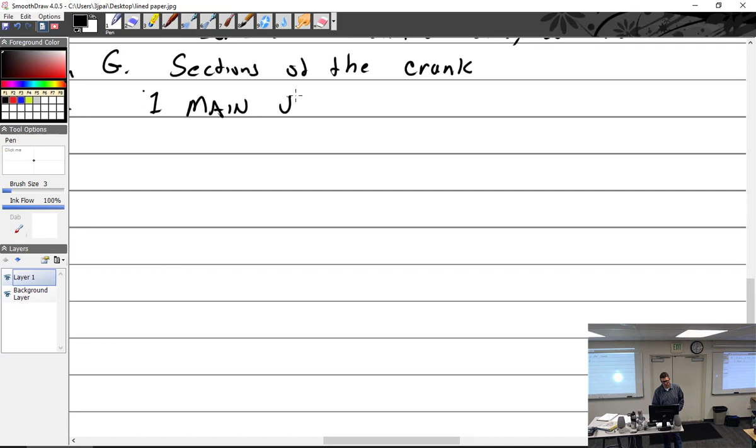All right, we are talking about crankshafts. I'm up to G, which would be the sections of the crankshaft or parts of the crankshaft. Sections of the crank. This is going to be the easy part right here. So we got the main journals. Main journals, which are right there. So we got the mains: 1, 2, 3, 4. Because Lycoming says this is 1, that is 2, that is 3, and that is 4.

And we've got the crank pins. Crank pins, also called conrod journals. So those would be that, and that. And if it is a Lycoming, this is number 1. This would be 2. This is 3. That must mean that's 4.

If it's Continental, it's backwards. Continental, because they're gold, that'd be 4. That'd be 3. That'd be 2. That'd be 1. Like with the bearings earlier when I looked this up there. All right, let me see.

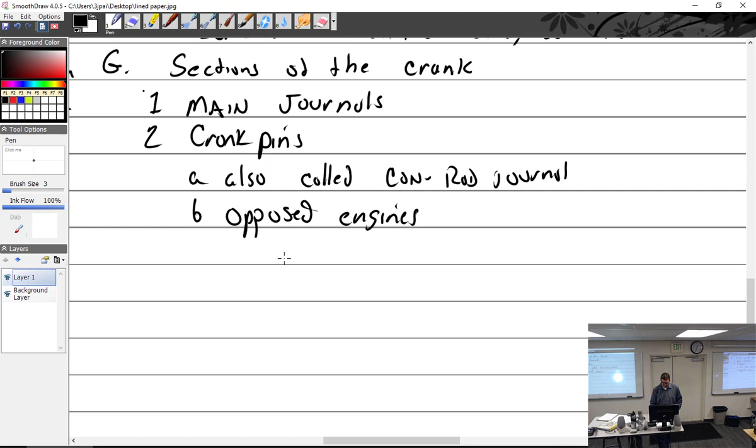B. So opposed engines, or boxer engines if you like, have 1 throw per cylinder. And a throw is just the journal. So the one we just looked at had 4 throws on it. They are numbered in order of cylinder placement, as I just showed you. So Lycoming has the 1 in the front, Continental's 1 in the back.

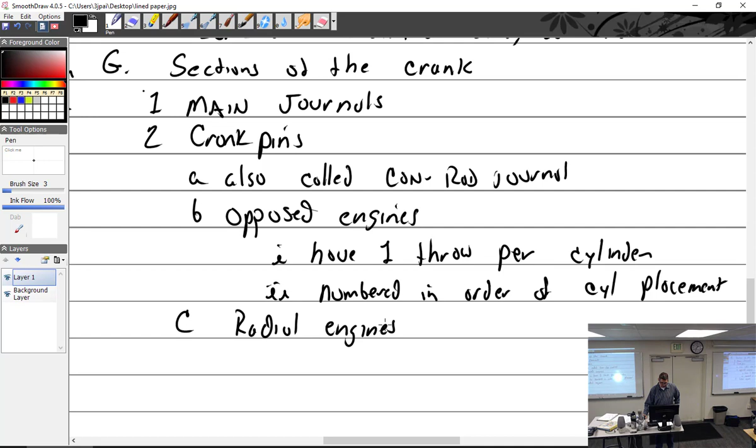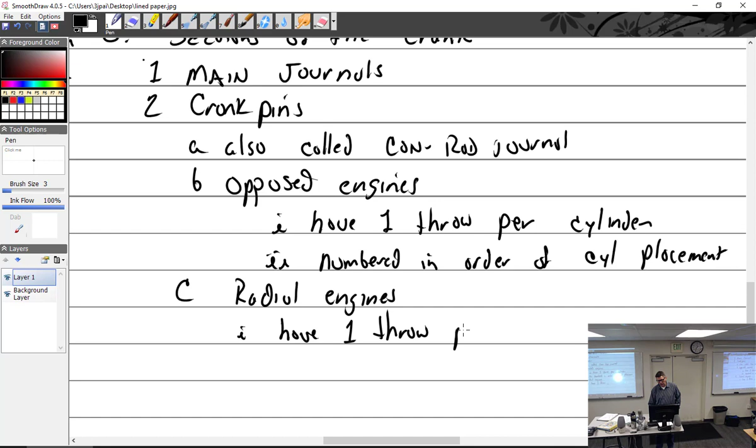Radial engines, they are different. Radial engines, they have how many throws? 1 throw per row of cylinders. So a single row radial will have how many throws? 1. And a double row will have 2. That's easy math.

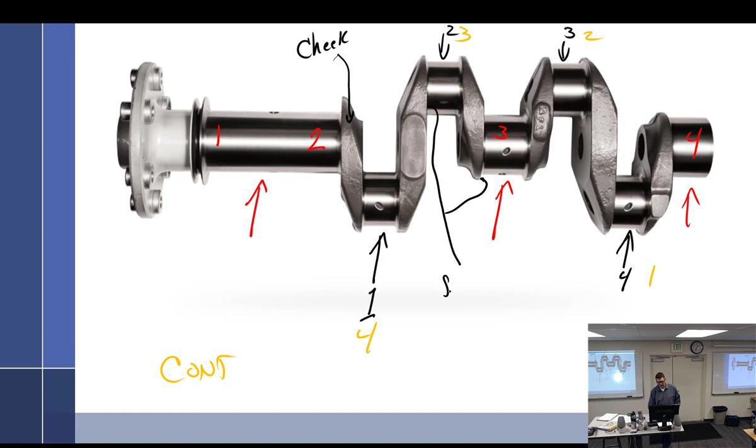Let's see, we have the crank cheek. That is, right, change my color. Right there, that'd be the cheek. And I think the next thing I have on there is the fillet, which would be any of these little corners right there. So what do I got next? Yep, fillet. That's the radius at the end of each journal. So right there too.

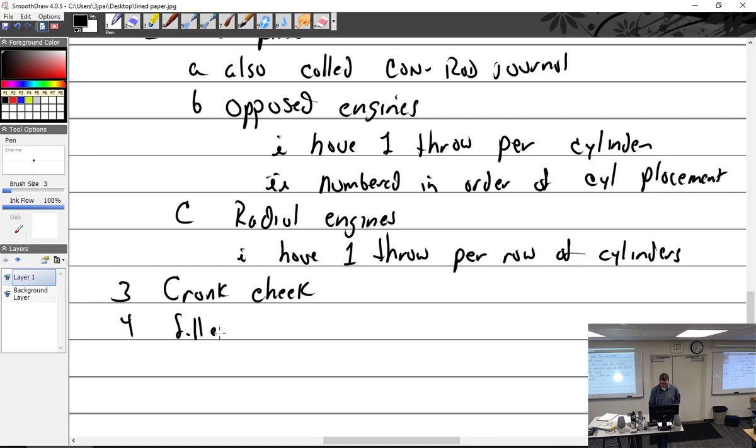Crank cheek, and let me see. And 4, we have the fillet. And that is the radius at the end of each journal. All right, let's see, anything else I got to say about this?

I guess so. I'm not going to write it, but up here on the crankshaft flange, we have the bushings. I don't know if I mentioned this here or some other place, but these bushings are not necessarily all the same. Some of them are different. They always take the same size bolt, but some of them are longer. That appears to be about yay long, and this one appears to be longer because it is longer. And what that is, it's an index.

And so there's a service instruction, shocking, that will tell you which engine where to put the indexed bushing, the longer bushing. And it could be a long one here and a long one over here, or just a long one there, or maybe a fat one here. This one, not to shame it, may be fatter. So it could be fatter, longer, different types.

And the whole idea is you as an engine mechanic are smarter than the average bear. And so you would follow the service instruction and put the index bushing in the correct place. And then the person putting on the propeller, who is not as smart as you, would have an idiot-resistant way to put the propeller on, because the propeller will then be indexed to the different bushings. There'll be a different hole in the propeller. And so the mechanic should see that and then install it.

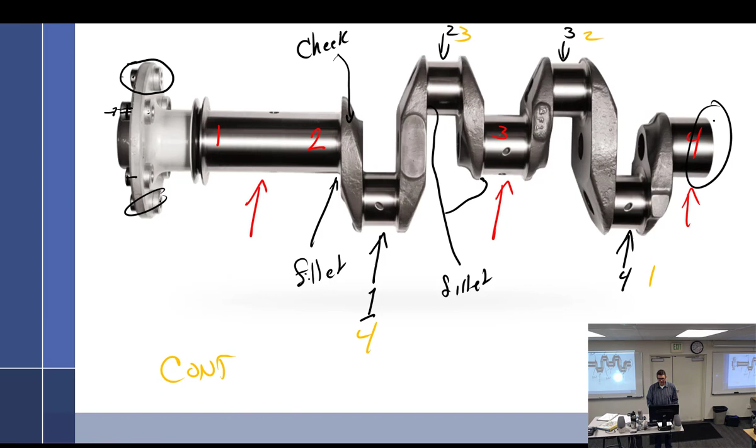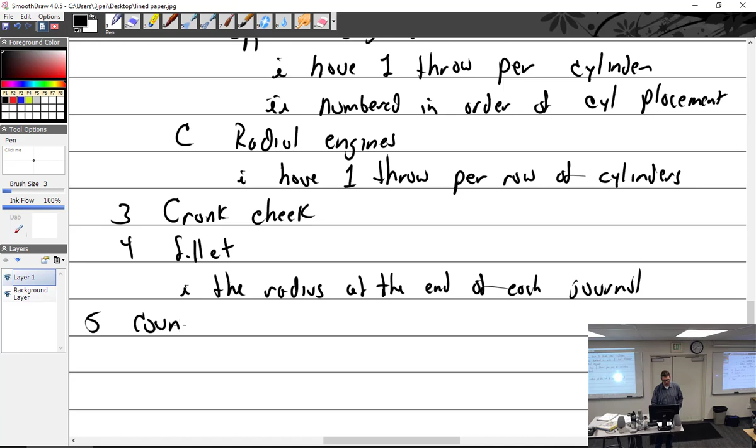Sounds good. All right. Okay, let's talk about counterweights. Bigger engines, where we're getting into the Lycoming 200 horsepower and up, they're 4 cylinders. I don't think anything below 200 has it. I could be wrong. We'll just say the Lycoming 360s, and the Continental probably 360s as well and up. Those are 6 cylinders. They have counterweights. Well, so does the radial engine I showed you, not to be confused.

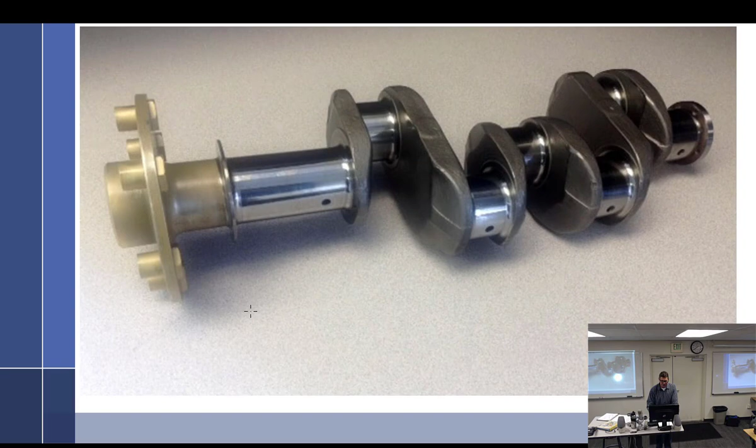So let's see, which way do I got to go? There we go. Obviously, this has gigantic, very heavy counterweights down here, but those are usually fixed. Not always. The smaller ones could be floating as well, but these counterweights have to be there, and they are fixed. This is just a crankshaft. It used to be. Somebody cut it very nicely right there. A lot of crankshafts have dynamic counterweights, not fixed. These would be called dynamic counterweights, and they're loose, and they're supposed to be loose.

And if you looked in your book and you're reading about it, you say, oh, of course, I remember reading that. The idea is if you were to take, and I should have made something like this, say a large nut on a string, and I hit that nut, it kind of comes back, and as it swings, I can hit it again, and every time I hit it, it swings further and further, right? So I'm setting up a dynamic imbalance.

The power pulses from the cylinders actually resonate through the crankshaft, and that's what it's like. And so you get this out of balance. It starts to repeat itself. We do it by order. I'll explain that. So what they do is, if you took that same nut on a string and tied a string to it, put another nut down here, every time I hit that one, it would go this way, and this nut kind of counteracts it, right? So that's what these are. This is the counteracting nut.

And, oh man, I'm trying to think. Some of the Continentals have 3 rows of these things, if I'm not mistaken. And then most of them have 2. So we'll say at least 2 on 6-cylinder; 4 cylinders usually have just 2 or 1 set. So you have a set here, and then you go a bit later and have another set. So there's these hanger blades, which are bushed, and they have the counterweights that ride in them, and they're loose. They're supposed to be loose.

How would I want to do this? So if you look at a cross-sectional area, a snap ring kind of looks like that. With a very square edge, kind of a rounded edge. It's just how they stamp them and how they make it. And so you always want it so that the force is going that way on it.

So in other words, when I put the snap ring into this, that very sharp edge goes outside and the rounded edge goes on the inside. So if you're trying to push that way, it catches on that sharp edge. So I always install my snap rings that way, since I did those and I kind of learned that. It's the only place it says it. You must put them in that way so that the force is going, trying to push it out that way.

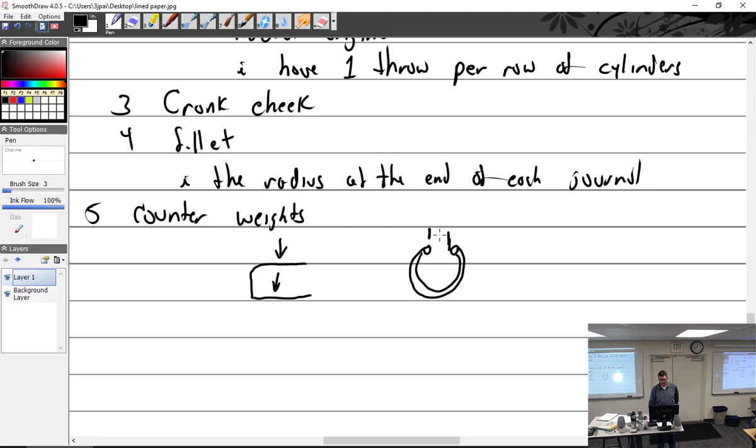One of the manufacturers, and now it's just kind of eluding me which one it is, the snap ring. Got the little hole right there. Of course, there's some depth to it. You have to measure this distance. Oops, actually this distance right here. That distance, you have to measure it, and it's part of the installation instructions. You measure from center of the hole to the center?

I want to know, because you can buy a no-go gauge where it's actually the space in between on the engines. But I can imagine, do you guys have some stuff on your helicopters where it's hole-to-hole? Probably. Okay, well, these are not hole-to-hole, they're inside. Oh, it's Continental. And so you have to make sure that you have the proper distance. If you don't have enough distance, what does that mean? Too small. It's not engaged into the grooves. You haven't engaged it.

And so, for example, this is kind of interesting. So, right, I told you over COVID we were shut down here. And so I still got paid, and part of the thing that I had to do was I had to do X number of hours of extra stuff for the school. Or I could go out and work in the field as development. And so it just so happened that Nathan, who was here the other day, called me up and said, hey, come, we have a problem. Are you available? I said, yeah, I'm available.

And it was kind of interesting. He had a 182 that had pulled up to the hangar. Did I tell you guys this story? No. I mean, if I did, you'll just take a nap.

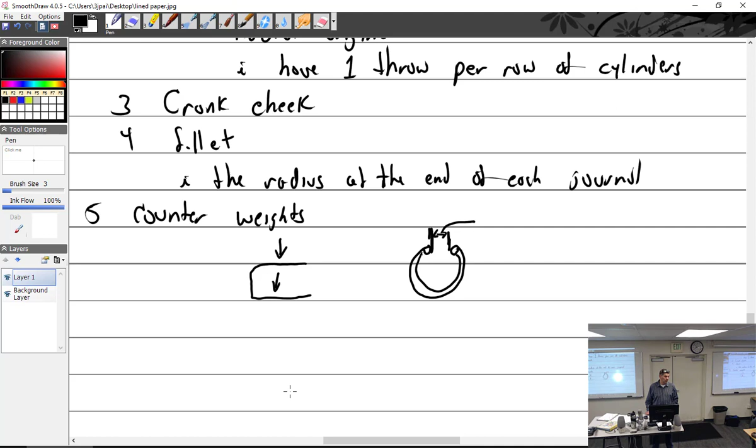So he took the prop off, sent it out to get overhauled. The overhaul shop said, nah, the prop's too old, we won't do it. So he had to buy a new prop, and that was a whole other disaster. But it quit throwing the belt. So counterweights, you know what they are? They are a problem. When you see them, run.

Mechanics do more damage to this stuff not knowing what they're doing than anybody else. They're really not that hard if you just pay attention, read the book. You've got to have the right service bulletin that tells you which position it goes in, what order it is, and what parts go in that order. Because most of the time, all the bushings are the same. It's just different roller pins that change the order.

So inevitably, well-meaning mechanics are going to take it apart. It's like, wow, I've got 4 of these things. I better make sure I get it back in the right spot. So what do they do? They get a big old number set and go whack! Put a big old dent in it right there. Or usually they just use a punch, put a dot here. They're smart. I'll put 1 dot here and 1 dot right there on the crankshaft. Then I'll put 2 dots here, 2 dots on the crankshaft.

Okay, don't do that. You're not authorized to be smashing dents into precision parts. But you can see there's a difference. That one's got a pin in it. That one doesn't. Yeah, you just don't mark stuff. Read the book. Read the service bulletin. Don't do it if you don't know what you're doing, because they're tricky. And if you get it off, you're going to have a harmonic balance problem.

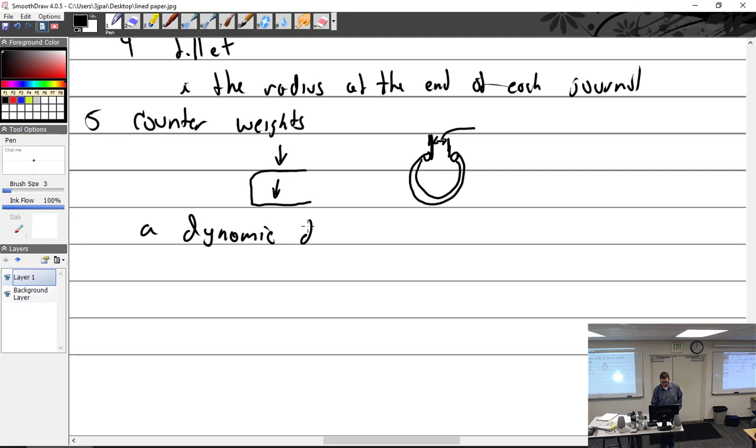All right, so dynamic counterweights. A lot to them, huh? Wow. Counterweights, a dynamic damper. That's what I call my kids. It is a swinging pendulum.

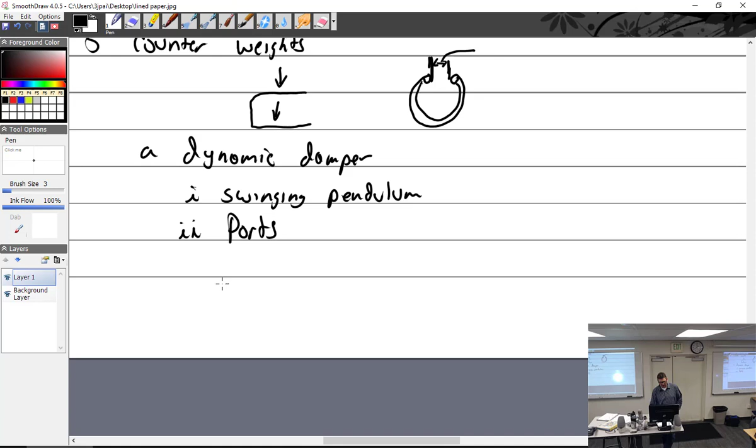There are a lot of parts. I want to write all the parts. Well, I guess I started parts. You have the CW, which is going to be counterweight. Counterweight hanger, or sometimes called the blade. This is the part that's part of the crankshaft. It's that part there. It doesn't come off. It's made into the crankshaft. So we got the counterweight blade.

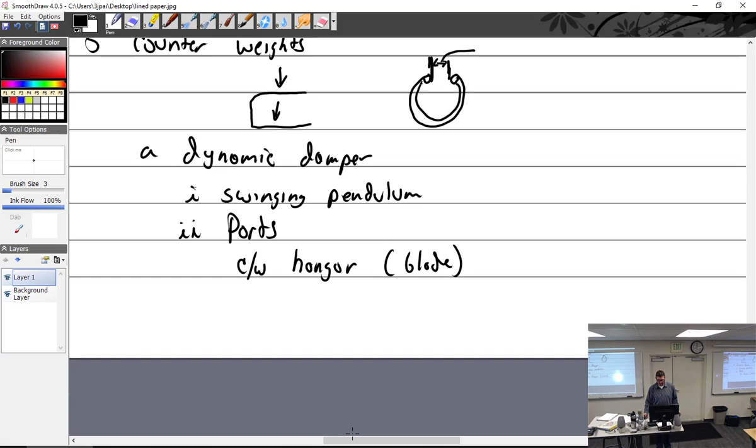I'm going to move. What was the counterweight what? Blade. We have the actual counterweight.

And they are position specific. Sometimes they're not. Sometimes they're all the same part number counterweight, and they just have different bushings or different pins in them. Sometimes they're different weights, and so they're all different. So you have the counterweight pins or the rollers. Usually those are the things that are different that gives it its order.

B, C, D. What is D going to be? You have the counterweight plates. Those are these little plates right here that go under the snap ring. They're actually a press fit. You have to measure the plate versus the counterweight. You have to make sure that it's an interference fit, meaning the plate is bigger. And the plates, when you look at them, are not a perfect circle. They usually have one or two little bumps on them. They're very small. You have to really look for them, but that's what holds them in place.

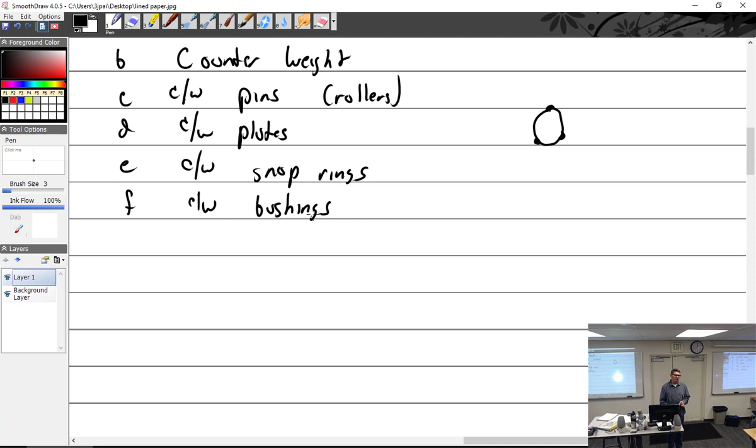And the counterweight snap rings, which I told you definitely go in a certain way. You have to measure the minimum distance. I could add one more, and that's counterweight bushings. I really, really hated changing counterweight bushings on the blades, because if you install it incorrectly and you pull metal while you're going in, because it's a press fit, so you have to have these tools, and you put the bushing on and you tighten it with the wrench, it would bring it in. If you pulled metal coming in, you'd ruin the crankshaft. So just pushing a bushing in, you could destroy a $12,000 crankshaft. So it always scared me.

Continental, you could change bushings in the counterweights, but Lycoming, you've got to actually grind them after they're in. So we always had to send out our Lycomings. Thankfully, I didn't want to do them. So what are these about? They are used to take out torsional vibration and power impulses.

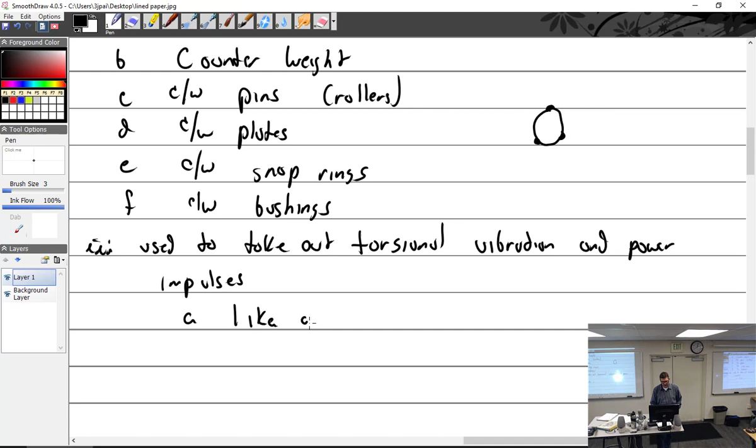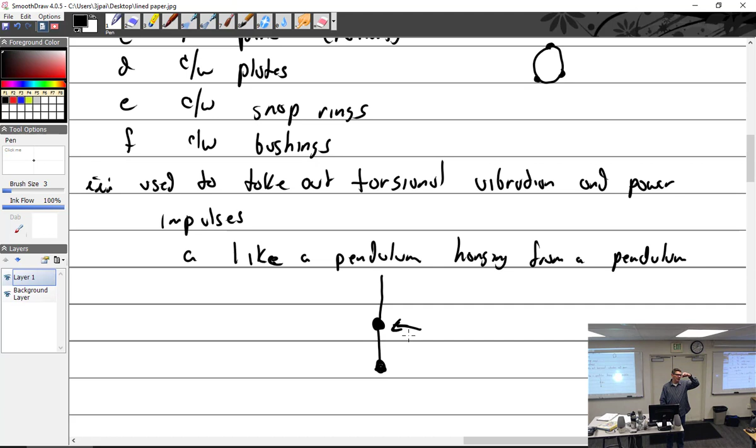And then I give you the example like a pendulum hanging from a pendulum. Which is to say, if you have a pendulum and you get it swinging, it swings. But if you add another one to that and you put pressure onto that, I think your book uses the example of blowing on it. So every time it would come back, you give it a puff of air. It won't go very far, because when it starts to go this way, the bottom one counteracts it. And so by changing the length of the string, you could change the order of what it does.

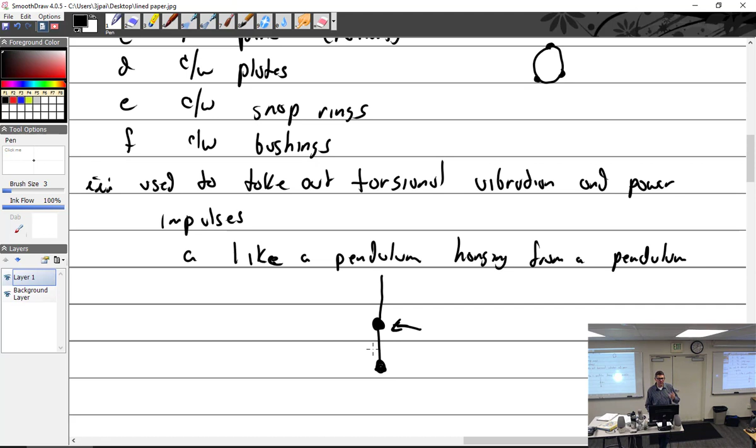Cars don't have that, do they? Not that I'm aware of. I think it'd be too hard because they're just so finicky. I mean, in a car, we can jam a throttle. Never, ever do that in an airplane. Even when you're taking the center line to take off, you don't jam the throttle. It's very nice and even going in. Every power change is very gentle and gradual.

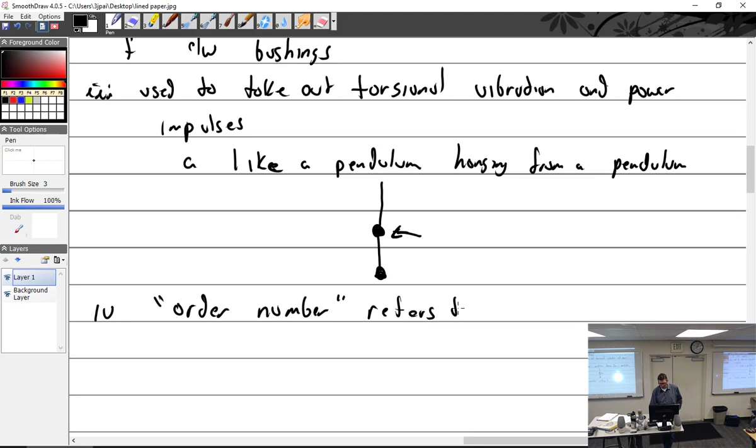IV, see order number. Refers to the rotation. Yeah, we'll say that refers to rotation. You understand order number, what I mean by that? Because Continental really uses that a lot. The bushings? The counterweights, the whole counterweights. They'll say this particular crankshaft has two 4th order, a 5th, and a 6th order counterweights, which I think is most of them. And you're like, what does that mean? And I'm telling you what it means, because that's as far as they tell you. It's just got two 4th orders, a 5th, and a 6th. Put the two 4th orders here and the 5th and the 6th like that.

So it refers to the rotation. So for example, first order is every rotation. And a second order is every other rotation. It almost doesn't matter if you understand that. You just understand they're going to make up a name for it. You got to put it in the right spot. Counterweights can be detuned, which is serious.

And then I had the story about the guy who hit the deer. They even did a run out on the flange. It used to be, wasn't that long ago, it's like 20 years now, when I was in the field, if you had a prop strike, AC 43.13 would talk about how you would take off the propeller and you'd do a run out, just like you guys did a run out on the crankshaft flange, right? See if it wobbled. So you were allowed to do that.

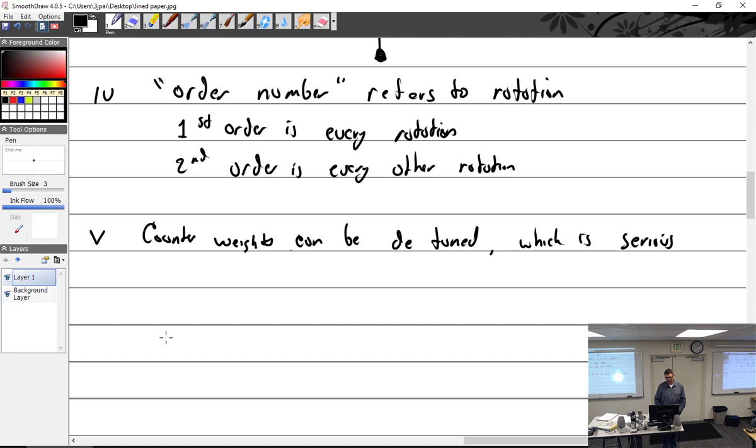If the prop has to be removed for any reason because of a sudden stoppage, is what they called it, you didn't even have to have a prop strike per se, but if it stopped in like 1.5 revolutions, or the prop had to be taken off because you hit thick grass and it slowed the prop down or stopped the engine, that counted. That's when they came out and said you have to do a complete disassembly, repair, and inspection, which is what I did a lot of. You'd be just shocked how many prop strikes are out there. So anyway, yeah, you used to be able to do that.

So detune happens when there's a flat spot created in the bushing. Detune happens when a flat spot is created in the bushing, roller, or both. So detune can happen... This is my Lycoming guy. Detune can happen...

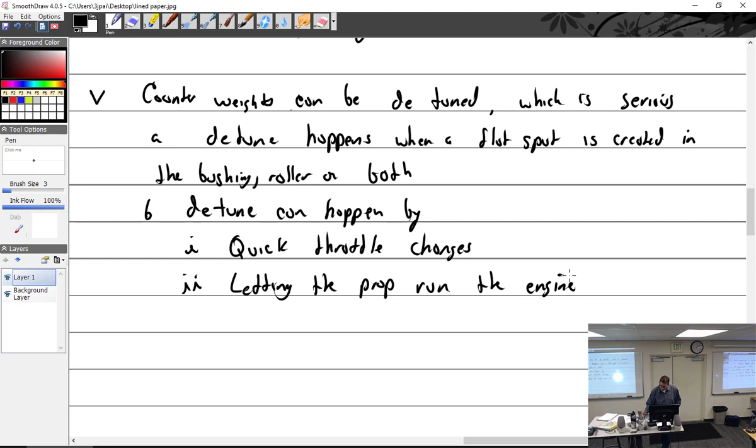Okay, I don't believe all of this, I will tell you that. This is what I got from Lycoming: L-E-T-T, letting the prop run the engine. Maybe I'm being an idiot, but I don't buy it. Which is to say that you pull the throttle all the way back. If I pull the throttle all the way back in my airplane, it should idle about 650 RPM, but I'm coming downhill because I'm descending, and I look over, and my RPM is anything more than 650, I'm letting the prop run the engine. I don't know about you two gentlemen, but I do that every time I fly.

And so then there was some statement made, way back in the day, that some of the radial engines had this problem, and they had some model number. So if that happened, I've detuned mine to the point where I'd need to rebuild it every time I used it. This is possible.

Feather at high RPM. What that means is we're talking about constant speed propellers on twin engine aircraft. Constant speed propeller means that the blades can actually change their angle. On a twin engine aircraft, you've got an engine out there and an engine over here. If one of them quits and that blade is still in normal configuration, now you're flying, and the wind has to drive that blade to drive that engine.

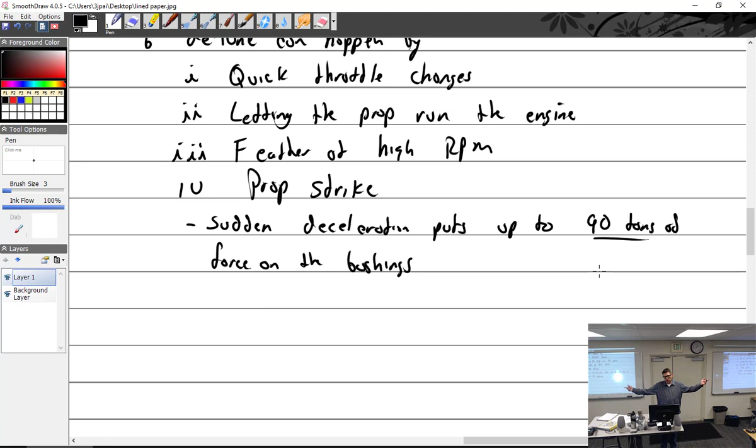Or obviously a prop strike. That's right. I said sudden deceleration. Puts, let's say, up to or about 90 tons of force on the bushings. You think, no, there's no way it's 90 tons. I don't even remember, I will get into it in the next class, it's in my notes. How many tons of force are actually on a propeller in normal operation? I want to say it's 20 tons. It is just an incredible amount. That's why I never stand in line with a propeller. If they're running this way, I don't stand here ever. The prop's going to come out at me.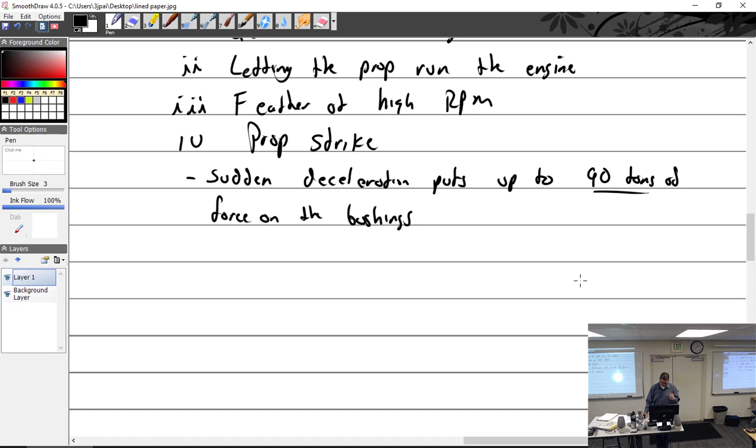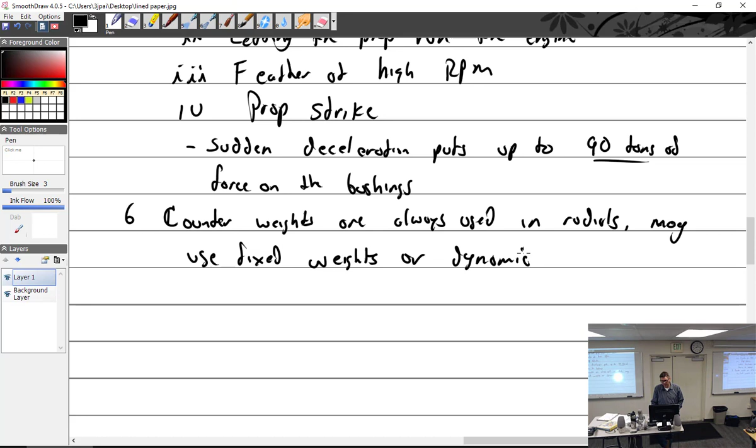Let's see. Dynamic. Oops, that's not what I was trying to change. We'll say counterweights are always used in radials, because it's only got one throw. So it's out here by itself; you've got to have something on the other end. So always used in radials. It may use fixed weights or dynamic. I think the 2800 that we have, which by the way, I brought out a power cord, plug it in anytime you want to watch it, that has dynamic counterweights on it.

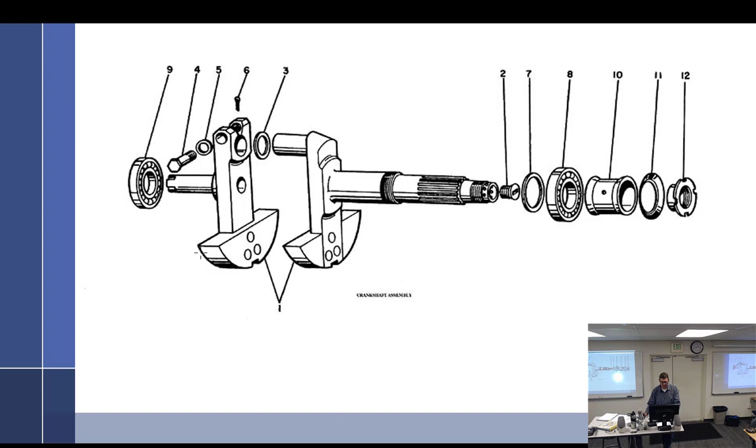All right. Let's talk about prop shafts. Got to know the different kinds of prop shafts. Well, right there, that's a spline shaft. Has splines on it. There we go. Another picture. Spline shafts, tapered shafts, and flanged shafts, which you should be intimately familiar with. None of those are flange shafts, but you know what a flange shaft looks like because it is on your particular engine. That's a flange shaft. So 3 types, right?

Dinner bell. Angel gets its wings.

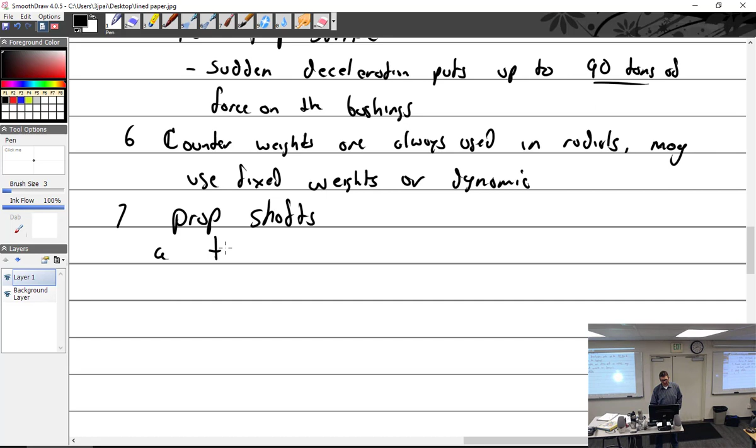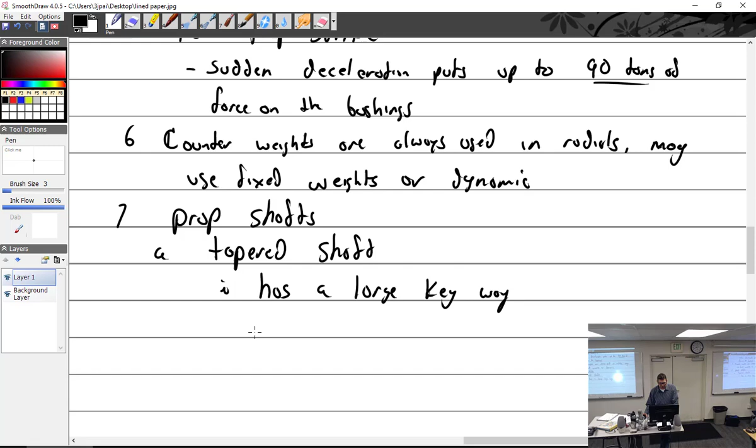All right, prop shafts. One, we have the tapered shaft. Tapered shaft has a large keyway, or a shear key. Let's go over to my picture. So that's a tapered shaft right there, here's another, because it's tapered. And it's got a cutaway right there, where a large square key fits in there. Well, propellers aren't tapered. Crankshafts are tapered, propellers are not. So if you have a tapered prop shaft, you have to have an adapter. There is said adapter. Don't put your finger in there. But you can look in there and see the keyway where it goes.

Keyway holds it in, and I suppose under a prop strike condition, and I've seen it, you could shear the keyway, but you gotta take the engine apart anyway if you've done that much damage. So this goes over the shaft, and this nut then goes on there and tightens up, and there's a hole here that corresponds to the holes there. You can see at the end, and you put a pin. Pin goes inside out. That way centrifugal force holds it in. You put a cotter pin, and that is safety.

Well, here's what you got to know about these. This will make you the genius of the day. When you want to take a taper off, you can see it's got a loose nut on there, and there's a C-clip in there, circlip in there. So, the super mechanic looks at that and goes, well, this nut tightens down and locks it, but it's got that lock in there, so you got to get the lock out. So, it's really, really difficult, but if you get enough screwdrivers and you work hard enough, you get that key out there. But if you finally get it out, you can take this nut off.

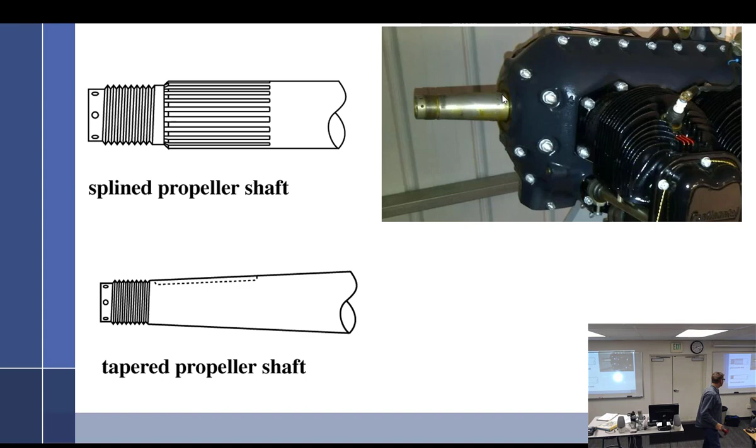But all right, so I guess that means it's break time. Break. Good stories, huh? You're like whatever. Keep them coming.